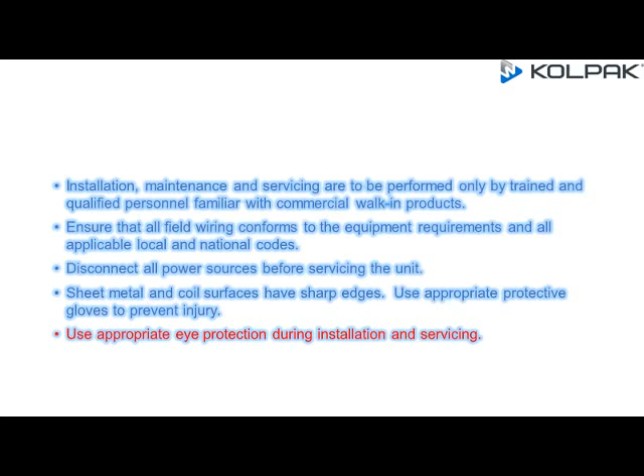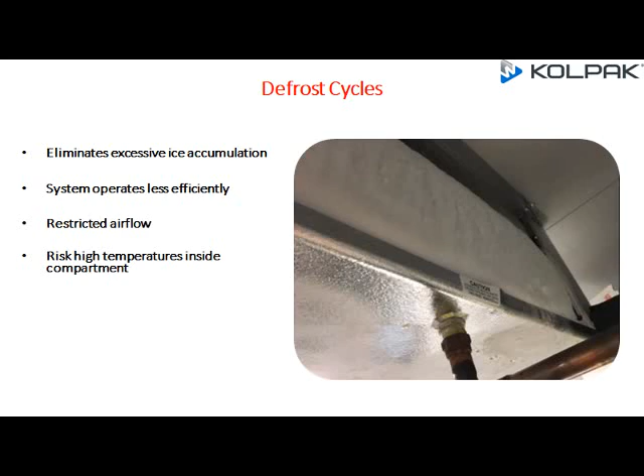Sheet metal and coil surfaces have sharp edges. Use appropriate protective gloves to prevent injury. Use appropriate eye protection during installation and servicing. Why walk-ins need defrost cycles? It eliminates excessive ice accumulation, which can cause the system to operate less efficiently. It can cause restricted airflow, risk high temperatures inside the compartment, and risk damage to the equipment. It's only needed when enough frost accumulation impedes airflow through the coil.

Types of defrost. Air defrost is time initiated, time terminated, 30 to 45 minute durations, solenoid coil de-energized, uses fans for air defrost to thaw coil. As of January 1st, 2017, no timer is needed for air defrost. The temperature control has the ability to initiate and control the defrost.

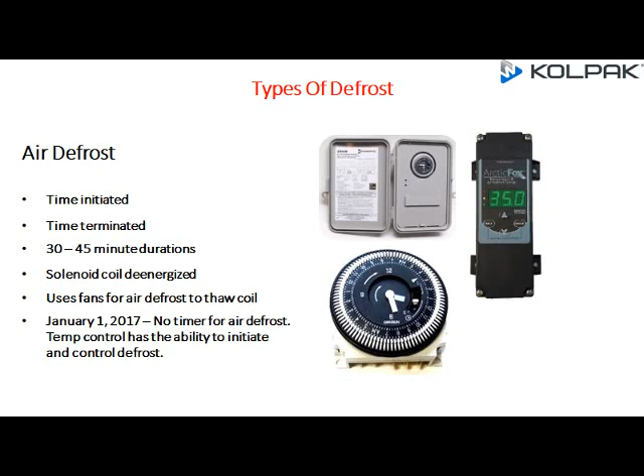Electric defrost. Timer is required, is time initiated, temperature terminated, usually 30 to 45 minute durations. Expect termination around 15 to 25 minutes. Fans, thermostat, and solenoid de-energize. Electric heaters thaw the coil.

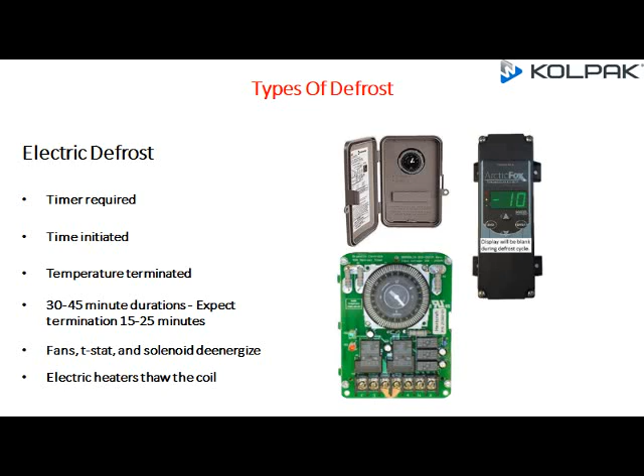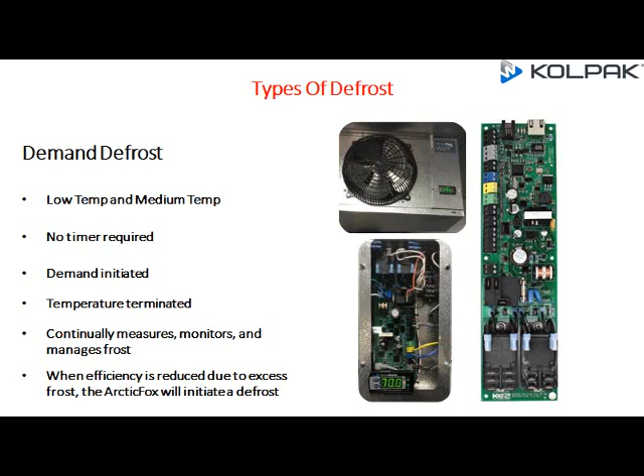Demand defrost. Low temp and medium temp applications. No timer is required. Is demand initiated. Temperature terminated. Continually measures, monitors, and manages frost. When efficiency is reduced due to excess frost, the Arctic Fox will initiate an on-demand defrost.

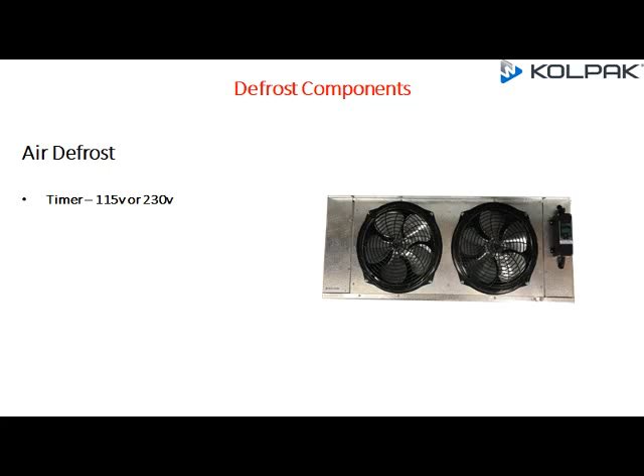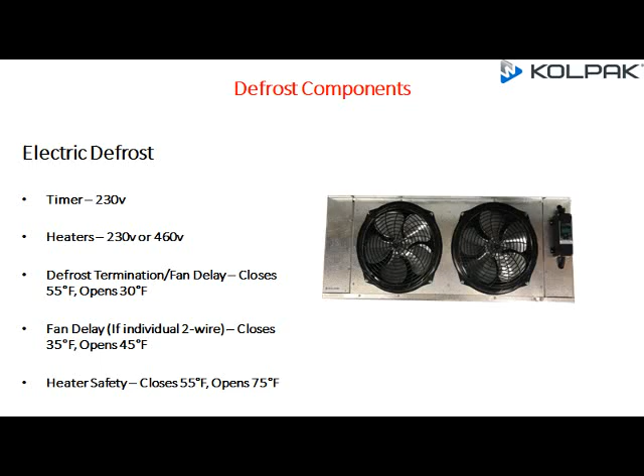Defrost components. For air defrost, timer, either 115 volt or 230 volt, and a thermostat. Electric defrost, 230 volt defrost time clock, 230 or 460 volt heaters. Defrost termination fan delay switch, closes at 55 degrees and opens at 30 degrees. Fan delay, if individual 2-wire, closes at 35 and opens at 45 degrees. Heater safety switch, closes at 55 degrees, opens at 75 degrees.

Defrost operation, air defrost cycle. When cycle begins, switch 3 to 4 opens in the timer, breaking the circuit to the temperature control and liquid line solenoid valve. The compressor pumps down and shuts off. Note, the evaporator fans continue to run during the defrost cycle. At the end of the defrost duration, switch contacts 3 and 4 close, energizing the temperature control circuit. Suction pressure rises, the low pressure control closes, and the compressor starts. The system operates in the refrigeration cycle until another defrost cycle is initiated by the timer.

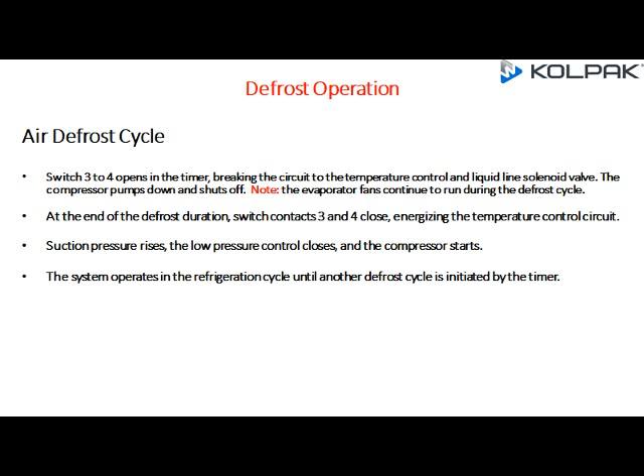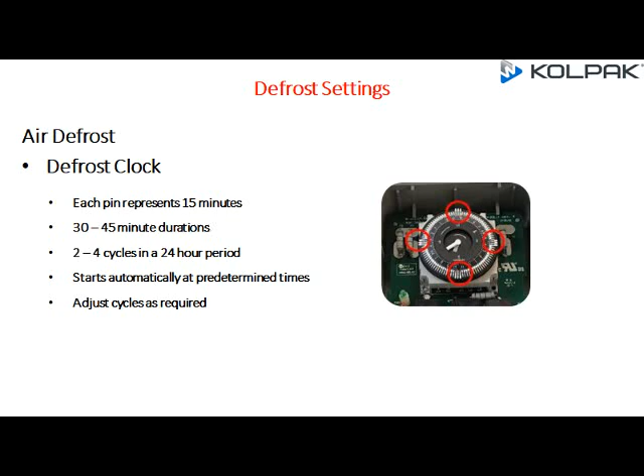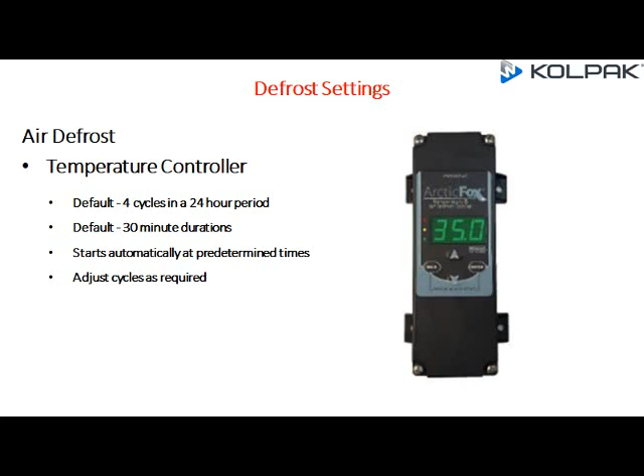Defrost settings. Air defrost. For older models with a defrost clock, each pin represents 15 minutes, usually 30 to 45 minute durations, 2 to 4 cycles within a 24-hour period, and it starts automatically at predetermined times. Adjust cycles as required. Newer models will have a temperature control to operate the defrost cycles. Default, 4 cycles in a 24-hour period for 30-minute each duration. Starts automatically at predetermined times. Adjust cycles as required.

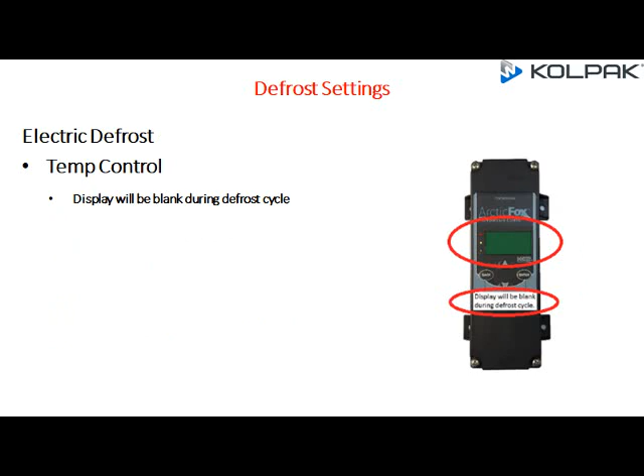Electric defrost. Each pin represents 15 minutes, usually 30 to 45 minute durations, 2 to 4 cycles in a 24-hour period. Time initiated and temperature terminated. Expect termination around 15 to 25 minutes. Starts automatically at predetermined times. Adjust cycles as required. The temperature control display will be blank during defrost. Note, the temperature control does not control defrost.

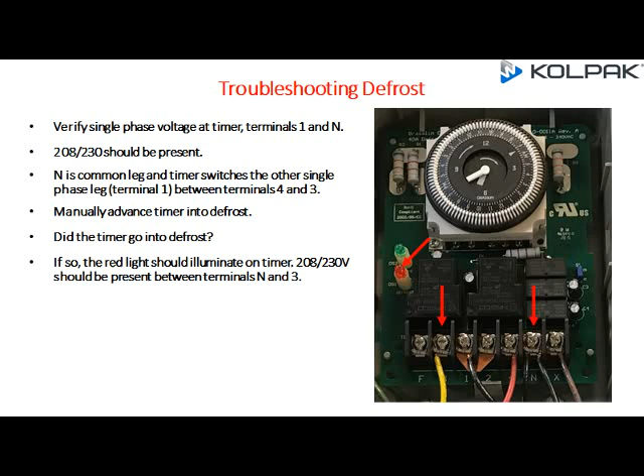Troubleshooting defrost. Verify single-phase voltage at timer. Terminals 1 and N. 208 or 230 should be present. N terminal is common leg and timer switches the other single-phase leg, terminal 1, between terminals 4 and 3. Manually advance timer into defrost. Did the timer go into defrost? If so, the red light should illuminate on timer. Correct voltage should be present between terminals N and 3. If not, inspect timer and termination switch.

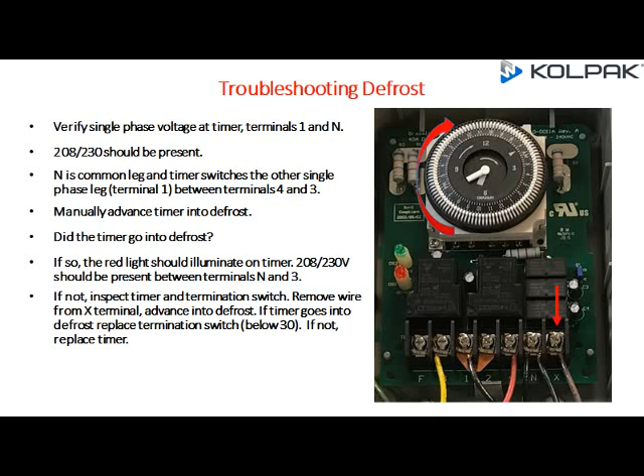You can remove the wire from the X terminal on the clock and then advance it in defrost. If timer goes into defrost, replace the termination switch. If not, replace the time clock. Timer is in defrost but heaters aren't energizing. Verify proper voltage at evaporator terminal board. If present at timer, it should be present at the evaporator coil terminal board. If not, voltage drop is in between the two. Heater safety should be closed. If open, replace heater safety. Compare amp draw to ratings on evaporator data tag. Replace heaters if necessary.

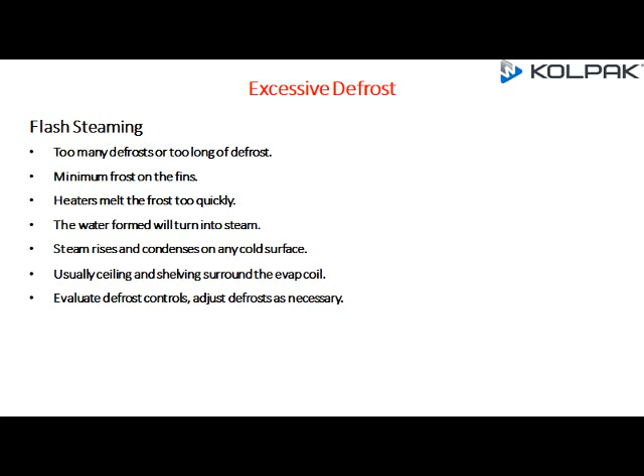Excessive defrost. Flash steaming usually is a result of too many defrosts or too long of a defrost. Minimum frost on the fins. Heaters melt the frost too quickly. The water formed will turn into steam. Steam rises and condenses on any cold surface, usually ceiling and shelving surrounding the coil. Evaluate defrost controls. Adjust defrost as necessary. This is a result of excessive defrost. Another result of excessive defrost.

After the freezer has been in normal use for 3 or 4 days, it should be checked to see if any adjustments need to be made. The unfortunate reality is that the amount of frost to be removed varies widely from location to location. Due to the variation in cooling loads, the humidity of infiltrating air, and other sources of moisture introduced into the walk-in, the amount of defrost times will vary as well and may need to be adjusted.